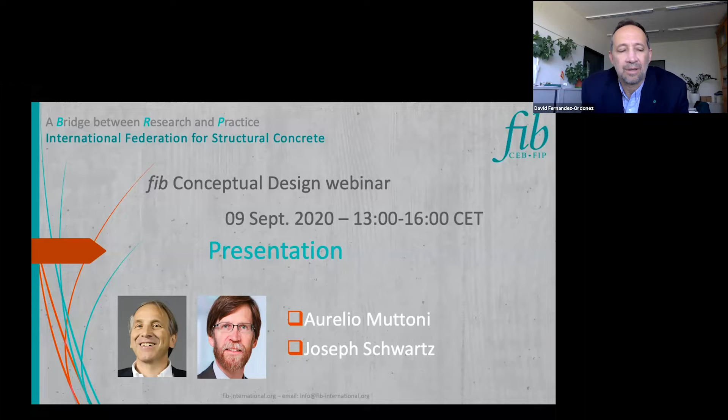Thank you, David. We will do our presentation together. Joseph Schwartz is a professor at the Swiss Federal Institute of Technology, the German-speaking part in Zurich, and I'm professor at the same university, but the French-speaking part in Lausanne. We are both part-time at the university, and we both have design offices and work part-time in practice.

Yes, of course, it's one of the most important parts in a design. It's mainly related to creativity. And the question is always, is it possible to teach creativity? And the second question is, is it possible to learn creativity? If we want to try to answer these questions, perhaps we can try to answer another question.

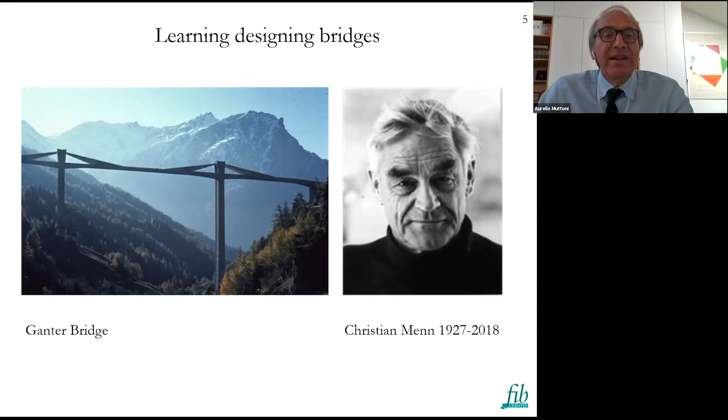So before we discuss this, and then later discuss two small projects that we have done, there are other questions that are also important to bring into this discussion. For instance, what is a good project? What do we call a good project?

A good project, we think, is a project which meets requirements all over the life of the structure, and of course also during the construction. The client specifications and users' experience are crucial, of course. The elegance and the site integration - to us, the site integration is also absolutely important when we talk about structural design.

The cost efficiency, this is a very important one. It is more difficult when you have to design something and you have too much money. It doesn't happen very often, but it is very important, and it helps a lot if you need to find an efficient solution also in terms of cost. Durability, robustness, resilience, of course, are absolutely important aspects, and sustainability, of course.

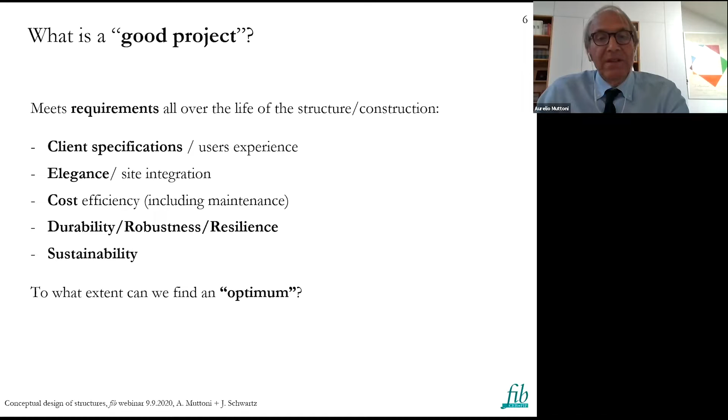And when we talk about these requirements and to what extent we can find an optimum, some skills and wills are fundamental in designing structures. One needs to understand how a structure works. This is a very important topic. So we started many years ago working together with Joseph, trying to understand how a structure works. I think this was extremely useful for us.

And another point - when we have a design, it can always be improved. This is very important for us, even when we are proud of it.

But how is it possible to improve it? And is there a procedure? So a lot of open questions. Do we need all structural elements? Some of them can be removed or simplified. This is also very important. I think improving a structure means also removing and simplifying it in many cases. So a very good design very often is one of the most simple ones that we can imagine. And can we increase the efficiency? This is a question that we should ask ourselves all over the process of designing.

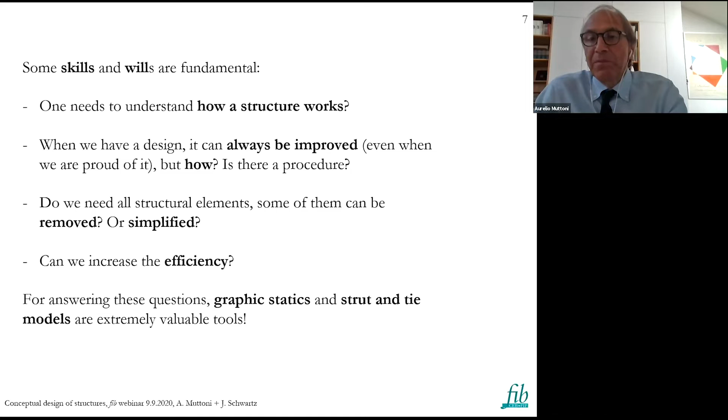And we have learned that for answering many of these questions, graphic statics and strut-and-tie models are extremely valuable tools. And with this respect, we had a good chance with Joseph. When we were PhD students, we started working on these topics, and this is a book that we started writing in '85, together with our PhD advisor at that time, Bruno Thürlimann. Another big chance that we had an extremely good teacher and good scientist. So together with him, I think both were crucial in our education.

And we have learned that it helps a lot in understanding very simple structures, like a simply supported beam in reinforced concrete. It helps understanding how it works just by investigating strut-and-tie models. And we have seen that with graphic statics, it's possible to determine forces just doing some sketches. It helps a lot understanding how the structure works. I think this, for us, Joseph, was absolutely crucial in our education and also in learning to design structures.

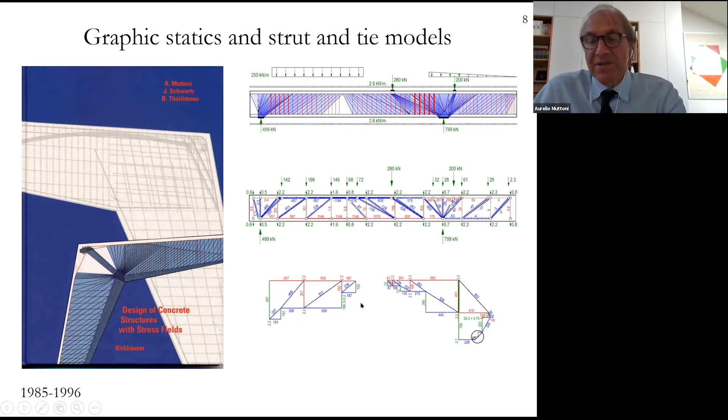And then we have continued with this. This is in '96. I had a very nice experience because I started teaching in a faculty, in a university for architects, Accademia di Architettura in Mendrisio. And this was a very nice experience because I saw that using these very simple tools based on graphic statics, it's also possible to teach architects how a structure works. And I think, Joseph, you have done the same in the last 20 years as a teacher to architects in Zurich. I don't know if you want to add something to this.

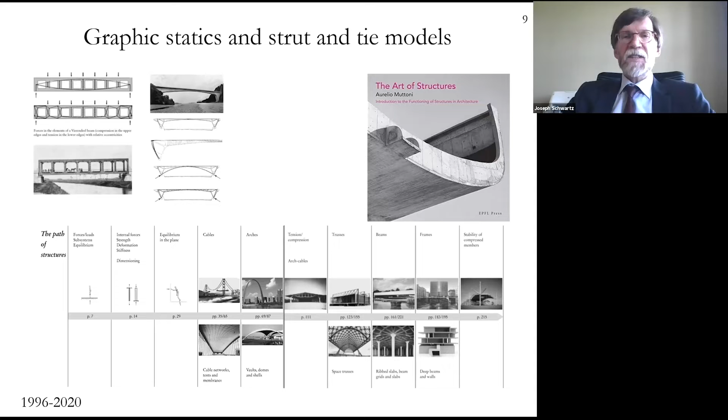Yes, perhaps you can show the next slide. Well, this is a very nice example.

Hello, good afternoon, good morning to everybody.

So for my part, this shows a little bit how we are introducing a simple way to show students how a cable works, perhaps coming back a little bit to the first presentation of our course, with these cables showing to the students how a cable works using graphic statics. The cable is the most simple element, but a very, very efficient and powerful element. And we gave the students a very, very small amount of thin cables, and it was very difficult to produce a net-like structure in a way that they didn't fall down. And so they could learn what efficiency means on the one hand, but on the other hand, they could also very nicely learn to feel how a structure works, to feel how the internal forces are really flowing at the interior of a structure. And we have the feeling that this is very, very important, bringing form and force together.

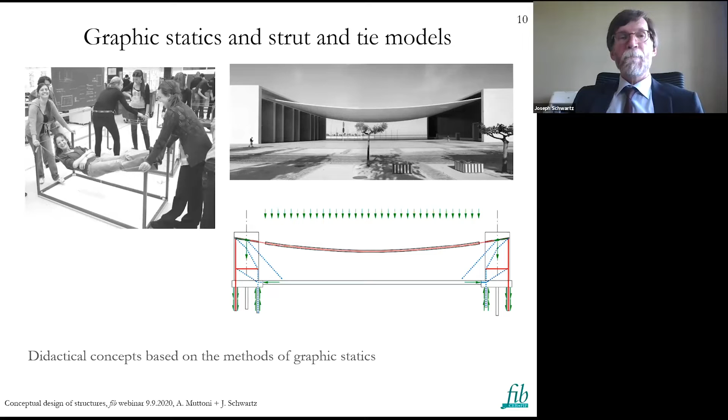But we have to be aware that structural design is just a part of the task. So another very important task we have learned: listen to the client, work as a team with the architect, with the contractors. This is absolutely crucial in conceptual design. Try to understand all site implications. Some of them are constraints, but they always help in designing. And we always say that without constraints, it is very difficult to design.

Try to understand what went well and could have been improved in your last project. It is the only way to do your next project better. But be proud of your projects, this is very important also. Even if they were not perfect, we all know our projects were not perfect, and now we have learned how to improve them. Projects are never perfect. And perhaps this is the most important thing that we can say: have pleasure. It is such a nice task to design structures. Do it yourself. Don't delegate it to a machine, to an algorithm, or to another kind of intelligence.

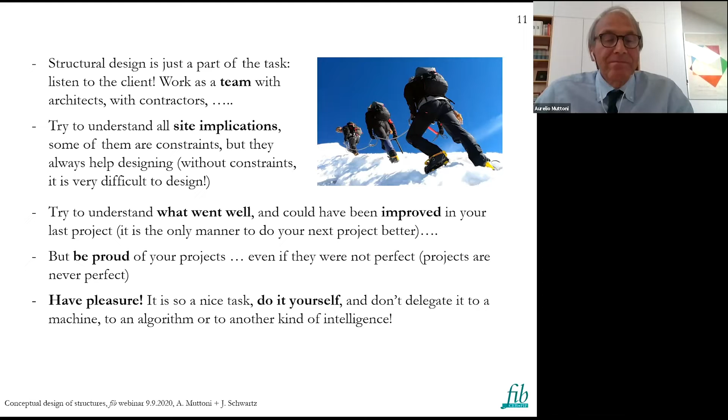So after this... absolutely, one short remark, or one small additional point I want to quickly mention. I think if we are speaking about team, for me it was very important to put this picture in: these people climbing a mountain, and they are climbing the mountain as a team.

When we are working with a design team in a project, it's clear that all members of this team have different training. They come from different directions, and it's not always easy to understand what they really want to achieve. I think it's very important to be open minded, to be open to the wishes of the architect, the contractor, and everybody involved in the project. It's also important to teach students that prejudices are not a good thing, and they really have to be overcome to work together.

All these people have other goals in their mind in some way. In this sense, it's very interesting to discuss the question of the optimum, which Aurelio has already mentioned. I think it's also very important, when working in a team, to understand that the optimum is not the sum of the optima of the different disciplines. That means it will always be a compromise. It's always possible to improve the project, but it's strongly dependent on the criteria fixed from the very beginning. Being aware of this is very important to be successful in developing a project.

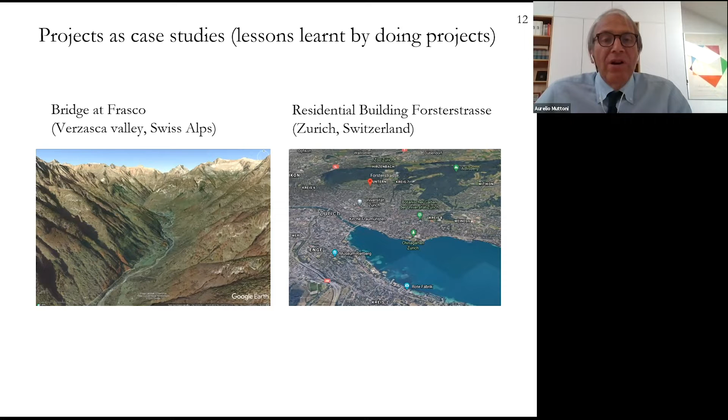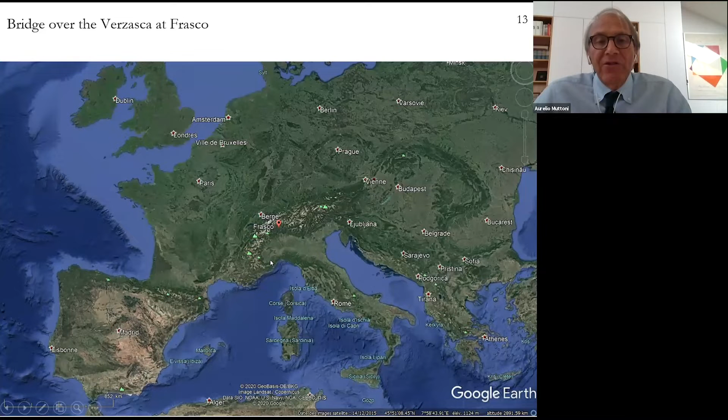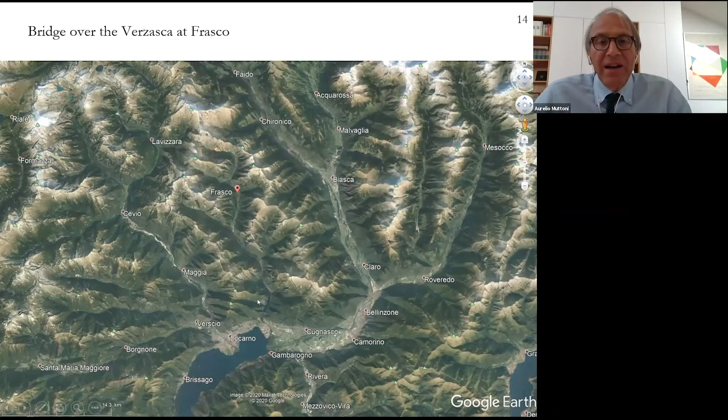About the site: it's very important to understand the site, as Hugo Corres already said before. We are here in the Swiss Alps, in the southern part, in this valley here. The language here is Italian, but it is still Switzerland. You see here a bit better the situation: this is the Verzasca River, and the task was to intervene on an existing stone bridge which crosses the river exactly in this location.

This gives an impression about the site. But as Hugo Corres said, Google Earth is not sufficient. One has to go there and study the site in a detailed manner in order to understand all the implications and peculiarities of the site. This is absolutely crucial, and not only the site itself, but also the surroundings.

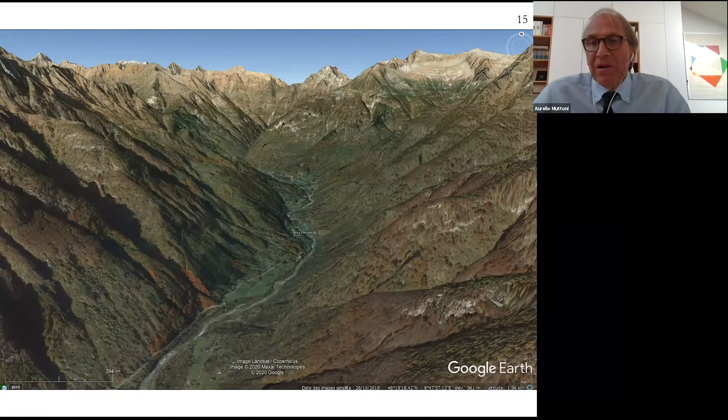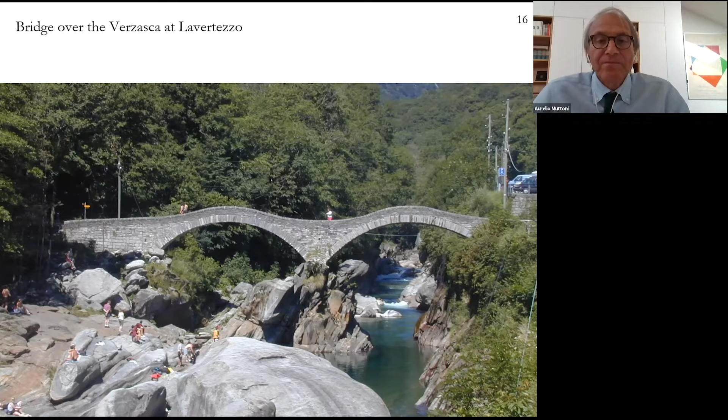There are many old bridges, mainly built in the 19th century. They are not so old, in fact, but reproduce exactly the same system as the Roman bridges. The Romans started building this kind of bridge, very similar to this one, about 2,000 years ago. You see there are side walls here, and very often a parapet, which is not just a parapet - it actually belongs to the bridge. If you remove the parapet, the bridge will look quite different.

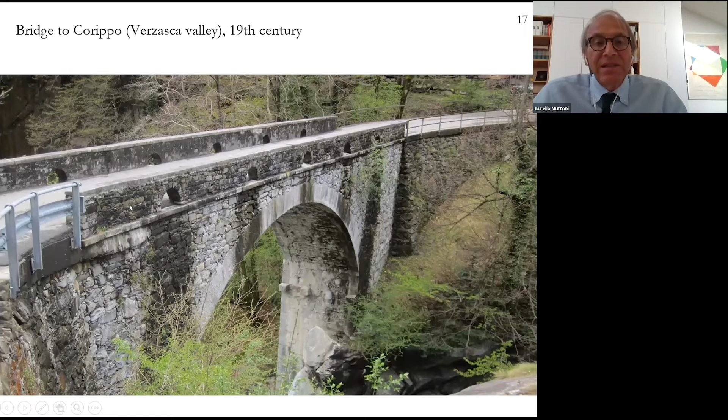Unfortunately, in many of these bridges, in order to widen the road, this parapet has been removed. This is exactly what we found in the bridge we were asked to restore - this was the situation when we started the project. The vault was not in good shape, and the parapet had been removed to widen the road. The client's request was to restore the bridge and also increase the width of the road again, which is not an easy task.

Perhaps the owner had in mind other projects that had been done in a similar manner.

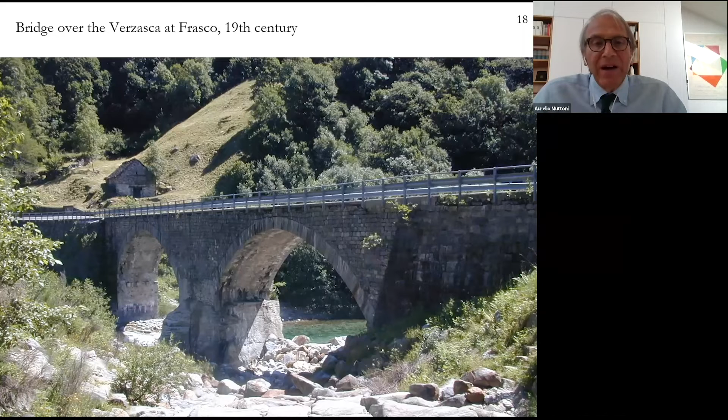Not far from this bridge, you see one that has been restored with a new concrete deck, a concrete slab over the bridge. I think this is not a good example at all. The parapet has been removed, and this cantilever creates a shadow. The perception and architectural quality of the bridge is completely destroyed. So I think this is really not a good example.

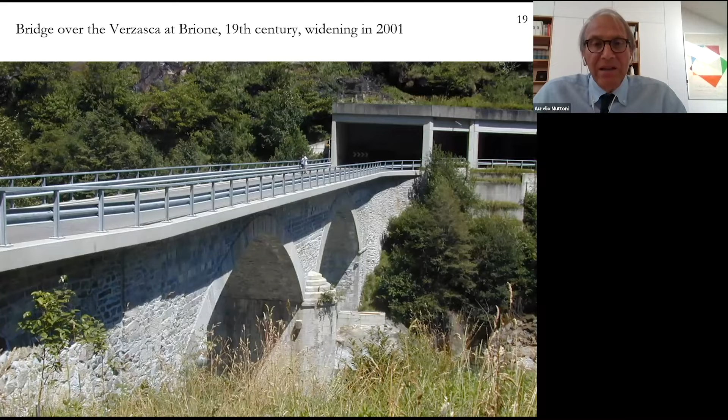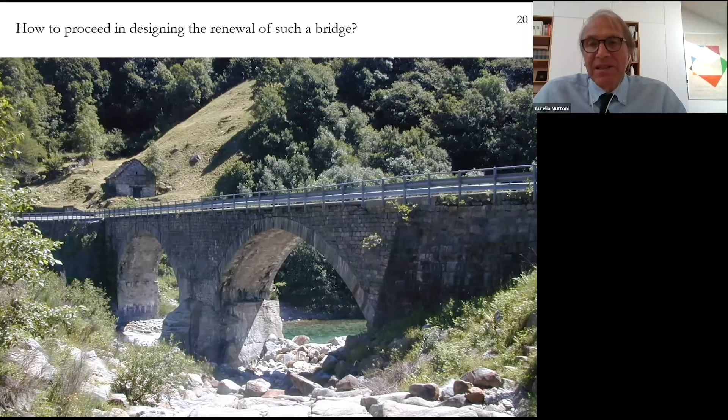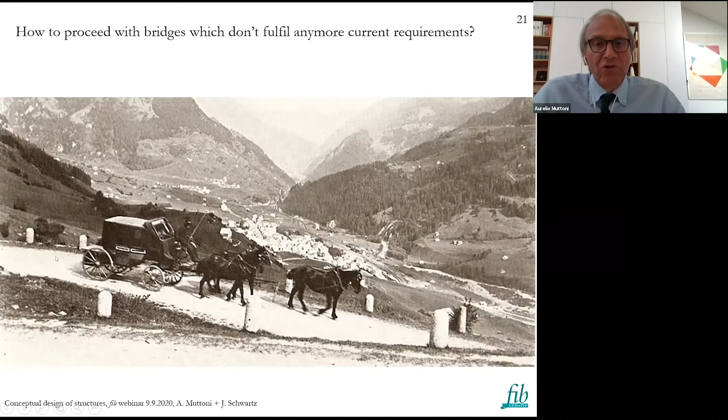When we started working on this project, the question was how to proceed in designing the renewal of such a bridge. This is a very general question. We have bridges and roads which were designed and built to be used in a certain manner, and nowadays the requirements are completely different. Many of these bridges don't fulfill these requirements anymore. Working on this, I came to the conclusion that perhaps the best approach was the same one followed several times: if a bridge doesn't fulfill the requirements anymore, the best solution is to build a new one and keep the existing one for other purposes.

This is also a very nice example in Ljubljana, a project almost 100 years ago by a well-known architect. You see it is possible to build a new bridge besides the existing one, with completely different uses—this one for cars and traffic, and this one for pedestrians and bikes. I think the separation is perhaps in this case really the best solution we can imagine.

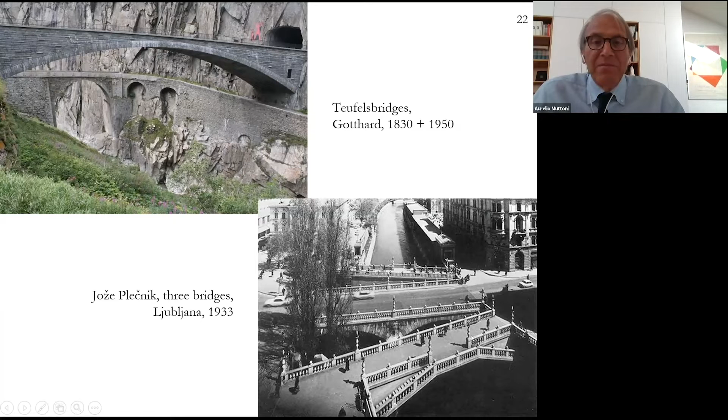This is what we decided also for this bridge here. This is the existing stone bridge, a very nice bridge. We decided to keep it, restore it, and use it as a footbridge for pedestrians and bikes. People can stay here and look at this very nice landscape. Then here there is a new bridge for the road. Here it's not interesting to just stay and look at the landscape, because there are cars, and they're too fast. But on the old bridge, it's a nice experience to be there. So this was the first very important choice.

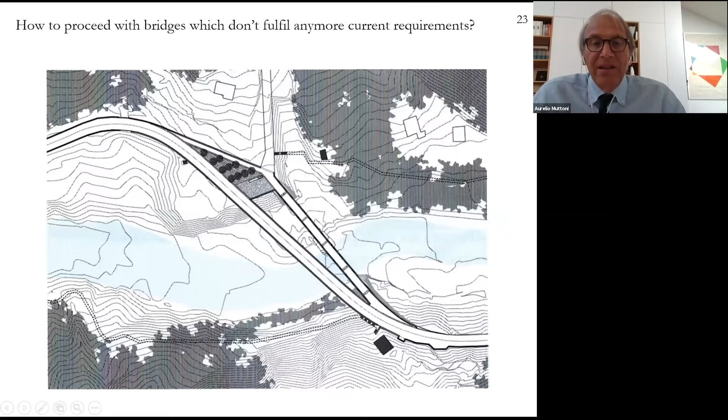When we start designing the new bridge, the site is very important, and there's another important question: can we be inspired by the existing bridge in designing the new one? This is the existing bridge—you see there's a block here, one block in the middle of this river, and they took profit of the presence of this block, building the stone bridge just on it.

So can we be inspired? Can we do the same? Well, not so easy. First of all, we don't have anymore the block where we'd need to build the new bridge. And what about the system? We have two arches—should we do the same, should we also build a new arch? This was my first idea: we have two existing arches with the block, but now we need to build the bridge with a much larger span because we don't have the block anymore, so it makes no sense to have a support in the middle.

Also, the technology and possibilities have changed in the last 150 years. My first idea was to say, okay, it is an arch—we will build again an arch, but with the best technique we're able to do nowadays. I remember at that time spending quite a lot of time trying to design a very slender steel arch with very slender elements supporting the deck. Working on this project, I invested a lot of time, but I was not proud of it at all. It was a very nice project from a technical point of view, and perhaps important in order to understand what was wrong. First of all, this project doesn't respect anymore the existing bridge.

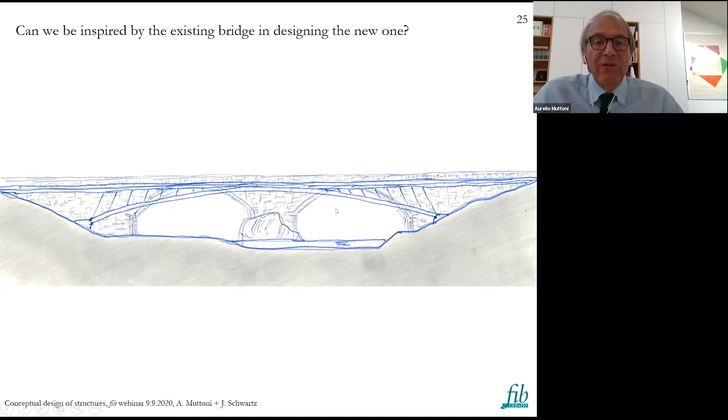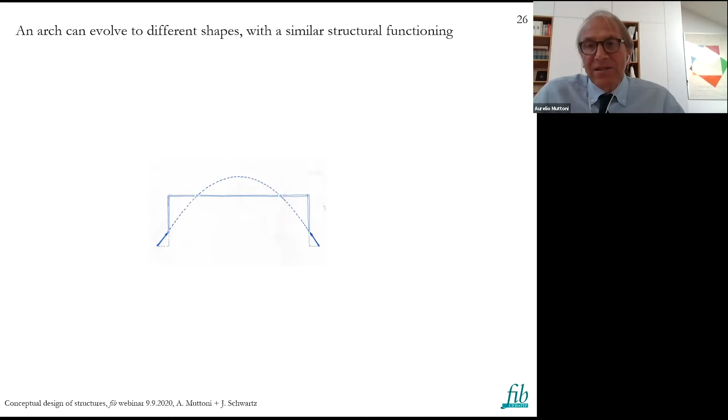But even in this case, doing this kind of project, you learn what you don't need, what is wrong. For instance, the arch is a very efficient structure, but you can adapt it so that it works more or less like an arch here, and then you get a frame. A frame has a very similar functioning to an arch, just with larger eccentricities, and at the end this is what I decided to do. So I started from the arch, but then tried to adapt its shape in order to better respect the existing bridge behind.

So, as I said before, a frame is just an arch with higher eccentricities of the thrust line. You can adapt the frame to increase the visibility of the existing arch, and to have fewer elements and better respect the existing structure.

Then, of course, doing this kind of consideration, there are also a lot of technical considerations we need to address. For instance, here we have a significant thrust force, because it's still more or less like an arch. We have a very large force that needs to be carried by the foundation, and these slopes in this kind of valley are quite unstable, because there can be a lot of water. This means it's very difficult to build a huge foundation here, and it was a big risk for the durability and robustness of such a bridge.

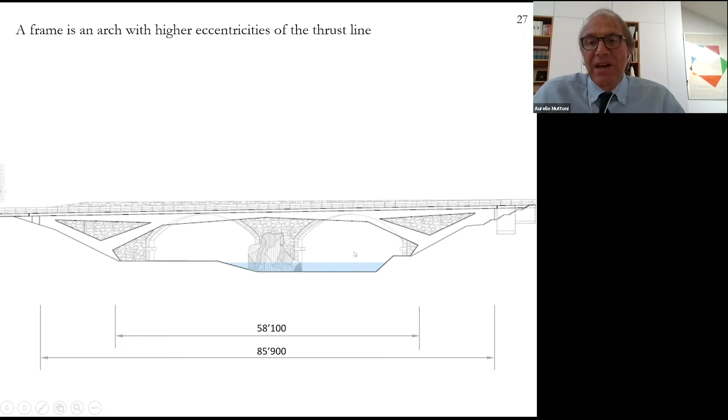And this was the next step. It was a technical consideration, but also related to conceptual design. I came to the conclusion that the most stable zone here, from a geotechnical point of view, is this one. And in order to optimize the earthworks, the best shape would be something like this.

It looks a little strange as a frame. Typically in a frame you have vertical elements here, but this is actually much more efficient in terms of constructability, and also because you reduce the horizontal component of the reaction, which is also a good optimization to reduce sensitivity to erosion.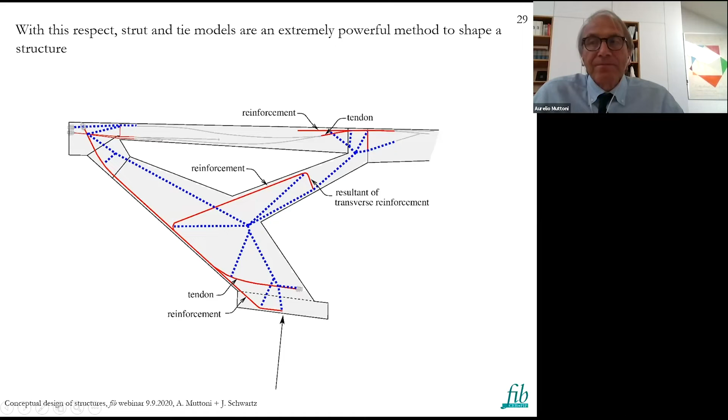This is also a very important issue—optimizing the shape of the structure based on the flow of forces. But that is not the only criterion for optimizing the structure; conceptual design is also very important. For instance, in terms of flow of forces, it would be possible to have a tapered beam, an element, a strut with variable depth. From a structural point of view, it would perhaps also be possible to do it like this.

But if you do this, you can see, if you increase the thickness here and reduce it here, your system will completely change. In this case, we have a bridge with this strut here, which becomes more important, and I think this element here will become more important too. And this is not the idea of the project.

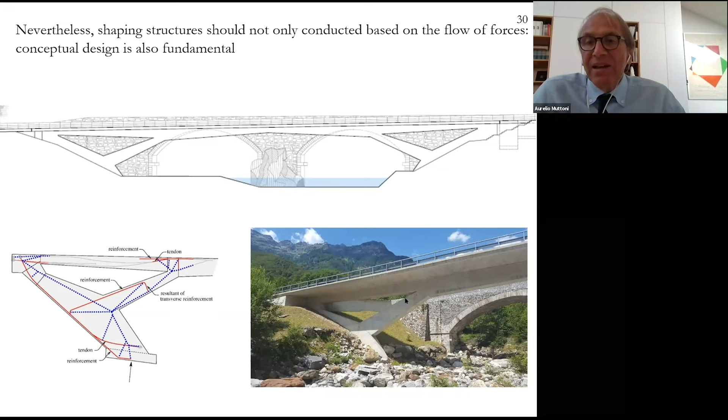There is another issue related to conceptual design here. When you build a new bridge beside an existing one, by definition you create a space. Very often you have to think in terms of space. We always design a bridge by sketching a cross-section, but a cross-section is not a 2D issue, it's a 3D issue, because it's related to a complex functioning which is typically 3D, and it relates to the space around the bridge, under the bridge, and in this case, between the bridges.

In terms of space, and in terms of the requirements of the road, it was unfortunately not possible to increase the distance between the two bridges. It was just not possible because of the road requirements. But it is possible, in designing the bridge, to increase the space under the bridge between the two.

And this is how I came to this solution, which is a minimum solution. It's just a slab with a strong beam. The eccentric actions will be carried by torsion of this beam, which explains the width, more than one meter.

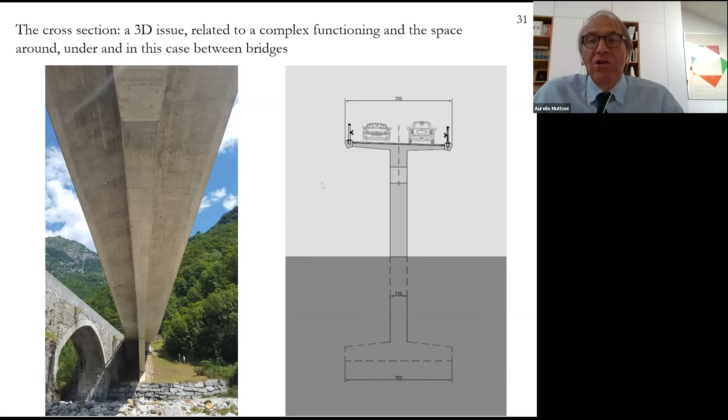So here are some pictures: the new one beside the existing one. The existing one here we have restored. I hope that in some years this new parapet, which is very similar to the old ones, will look similar to this wall. This was the idea: to have a restored bridge like in the 19th century, and a new bridge which belongs to nowadays but is completely respectful of the existing one.

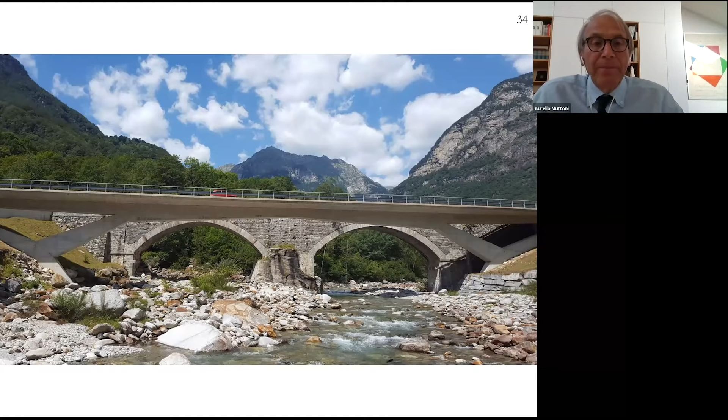And this picture shows that transparency is crucial in order to be able to see the existing one. This slide shows that having a strut here avoids the difficulty of having more or less the same inclination. It looks similar, but of course it's not possible to have exactly the same inclination.

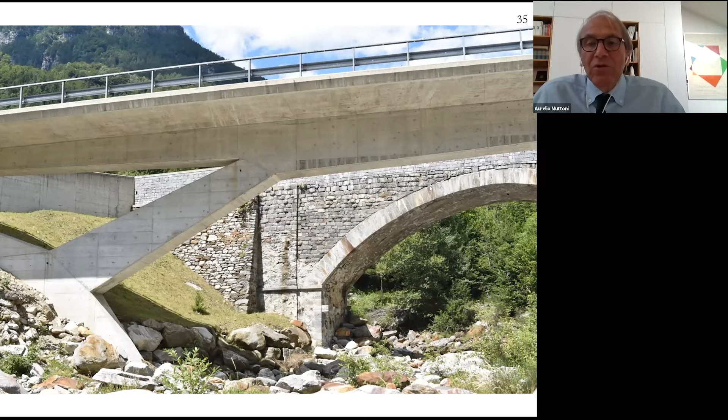But what is the inclination of an arch? Well, it refers to the main part of the arch, here, and to having a tapered beam here. It also helps avoid the conflict of slopes between the strut, the wall, and the arch.

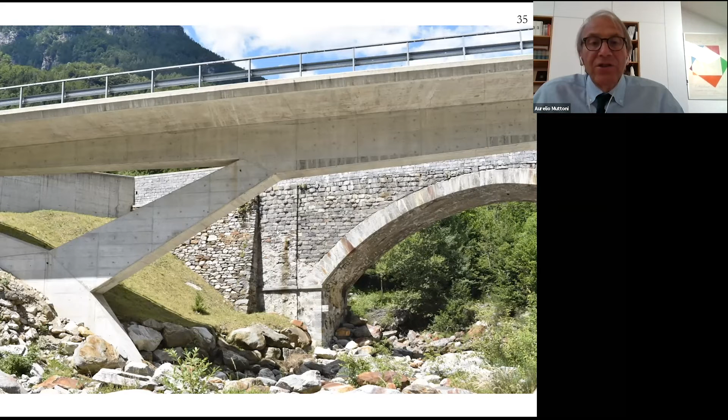Here's another picture showing the existing one and the new one behind it. And here again, if you have a variable depth, this is very useful because you don't have a clear reference between the strut and the arch, which means the perception will be simpler, because you avoid the conflict of slopes.

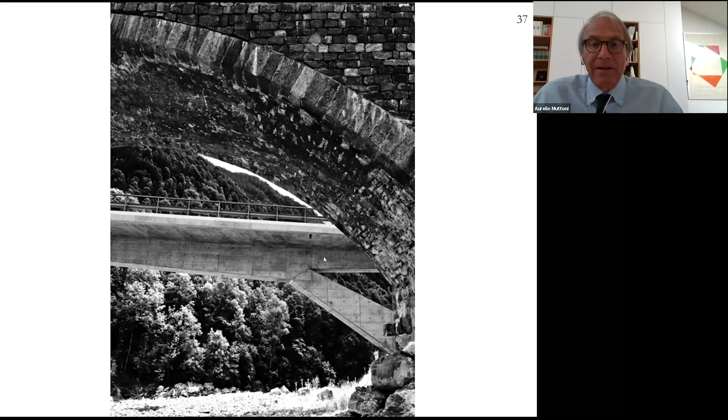As always, you are never alone when you design a bridge. There was a young engineer who was very important in doing the calculations, and the calculations showed that some elements needed to be improved and adapted, and the shape also slightly changed as a consequence. This is a very nice way to learn designing bridges - if you do calculations, you see the things that need to be improved. This is also a way to learn designing.

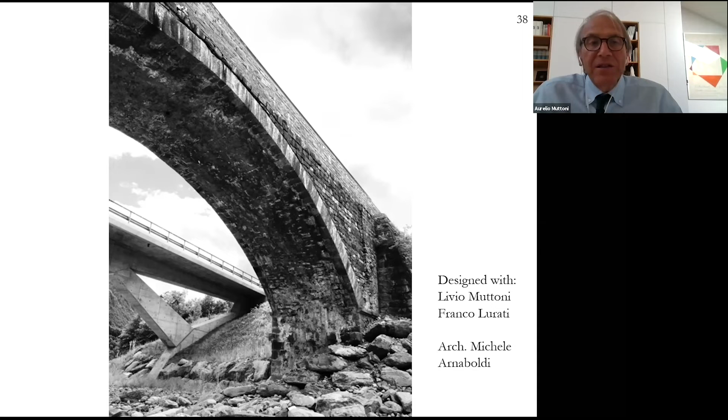And this is my partner in the design office where we designed this bridge. And here we have also an architect who helped us with considerations about the parapet and so on, and also in designing the space between the two bridges. Just perhaps some considerations with respect to working with architects.

This is particularly valid for bridges. During the last three decades, I've learned that one of the most fascinating activities of a structural engineer is to collaborate with architects and to contribute to their projects by discussing our structures. This refers to buildings, in fact. In building design, in some cases, the structure can become a source of inspiration for the architect's work and contribute to expressing an architectural concept. So we are contributing to the project by the architect.

In bridge design, the process is similar, but the roles are usually reversed. I'm convinced that structural engineering should be one of the most important components in designing bridges.

For instance, in the bridge that I've shown, and in many others I've designed, architects were involved. Their contribution is not always easy to describe. In some cases it was just a critical remark, a suggestion, or even a question at a crucial phase of the project. But even if the contribution can be defined as minor in terms of hours or quantity of work, sometimes just a remark or critical question is sufficient to have a significant impact on the final result. And this is the very nice thing about working with architects - very often they are important to improve our designs, also in terms of structural design.

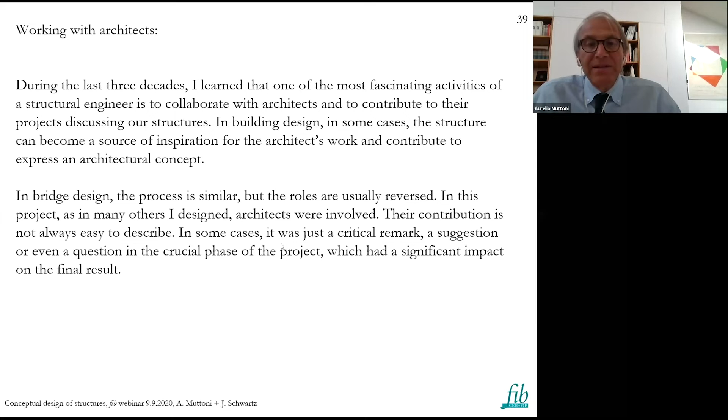So I think that the best is that we switch to the next part. Okay, then I will go on with the second example.

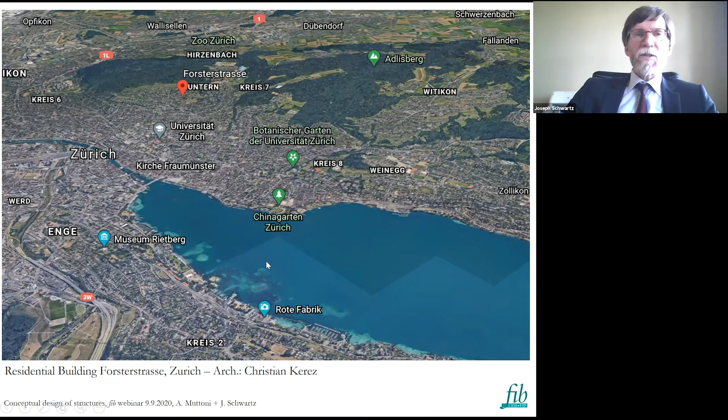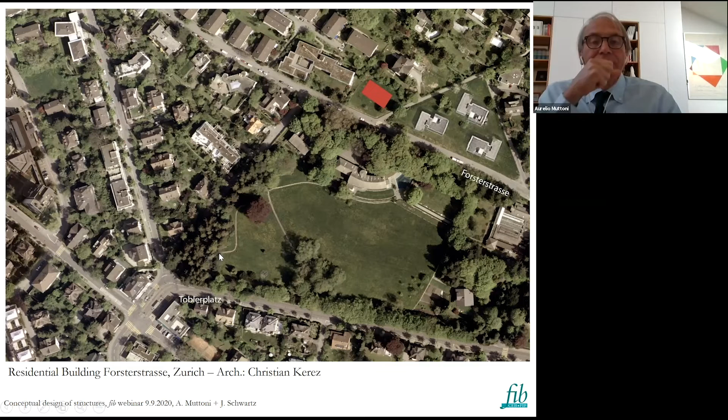This is a residential building in Forsterstrasse. We developed it together with Christian Kerez, and as Aurelio already mentioned, it's a totally different situation. We are here in the city of Zurich, close to the forest. We are on a slope, and there is a very nice view of the lake, the Zurich lake. Now, looking at the site situation, we see that it's a very small site. The goal was to build an apartment for 5 families, and we see this huge property here on the south. The lake is to the south, and you see these very high trees that block the view of the lake during summer and open the view in fall and winter.

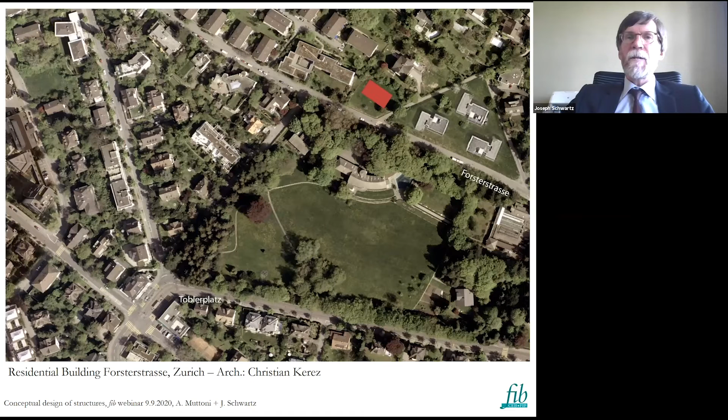Now we see these two aspects. The first is that we have this situation of openness and closeness on the one hand. On the other hand, we have this rather small site, and the idea was to develop a building, a structure with interior spaces that seem bigger than they are in reality. Also, as we heard before with the connection and space between the two bridges, this effect of generating space and influencing it through structure seems to be a very, very easy way.

Perhaps I want to start with this quote from the architect Christian Kerez, who says: 'Architecture is for us an indissoluble unity of material, construction, structure, and technical installation. The meaning of all these elements is strongly related to their contribution to the definition of architectural spaces.'

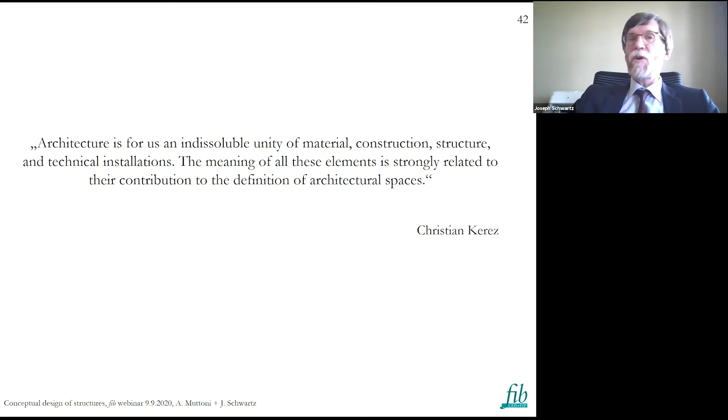From the moment we speak about architectural spaces, we are clearly going from 2D to 3D, which is not always so easy for civil engineers. But I think that from the point of view of the flow of internal forces, it's very important to be trained in thinking in three dimensions, activating the transfer of forces in three dimensions, as we have already seen today in all these different examples.

Now we created a small grammar - a grammar of architecture, a grammar of structure, a grammar of space building - by using only walls and slabs, no columns, no other elements, and no structural elements in the facade, with some exceptions.

Those were the rules we started with, and that was also the grammar, with a very small amount of rules, a very small amount of tools. We really tried to push it to the extreme.

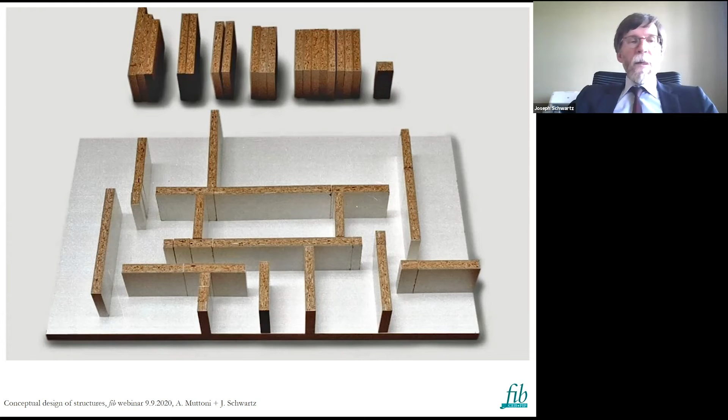Now, from the point of view of static principles, as I already mentioned, it's a question of balancing walls, so that it's not necessary to put one wall directly upon the other on the ground floor. The idea was to balance wall by putting one wall on the other, so that they only touch at one point when going from one floor to the next.

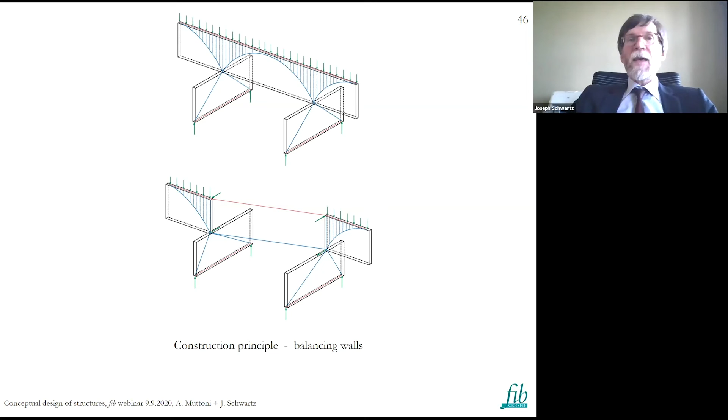That means now we have the whole repertoire and we can start to play with this. The big advantage is that, as the walls are no longer placed exactly one on the other, it becomes possible to have spans of the slab much bigger than the slabs between the walls on one floor, because the slab can either be posed on a wall or hang on another wall.

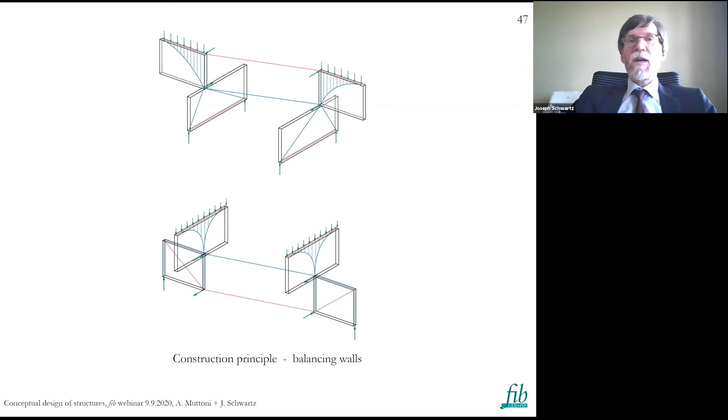You see this very nicely in this picture, how these walls are interacting. You also see very nicely that all the walls are in relation from the point of view of structural design, but also clearly in relation from the point of view of generating space and architectural design.

So it was a very nice negotiation between Christian Kerez and me to develop this system in a way that both the structural and architectural goals were, in the end, fulfilled in the best possible way.

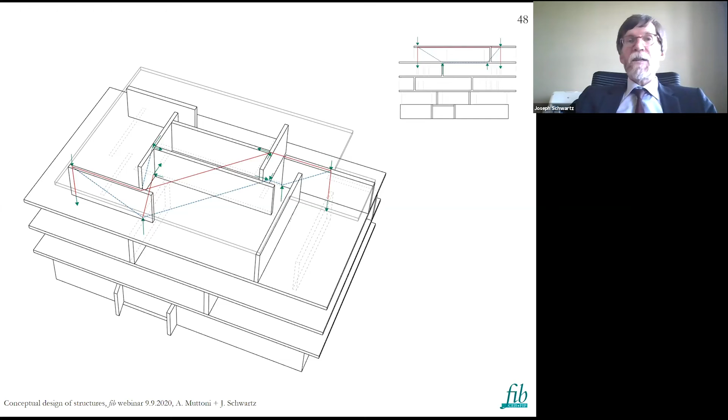You see this cantilevering wall, you see the slab, this wall is behind. That means this part of the slab is hanging on this wall. Also here you have a similar situation.

We have a very big space here, and this part of the slab is hanging on this wall. That means if, as a civil engineer, you are in this room or in that room, you cannot easily understand how it's possible to have these very huge spans without understanding that the slab is really hanging on this wall.

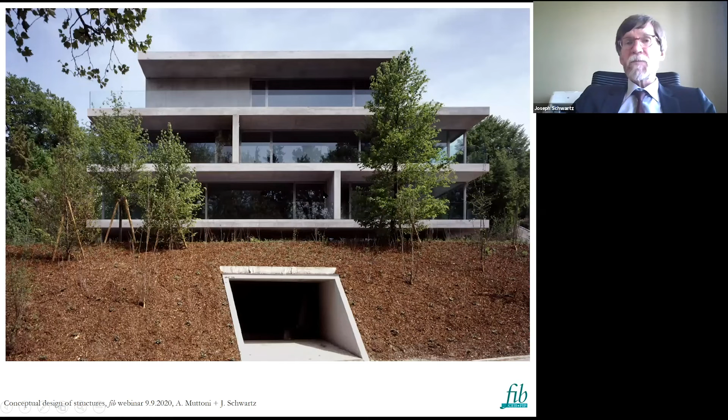There you see the final project. You see very nicely that we don't have any supporting elements in the facade without these separation walls. These are the separation walls between the different apartments, and on one hand they are necessary from the point of view of use. On the other hand, they are also nice to have as a kind of disturbing element in this clean situation of free facades.

For me, it was clear that we have to eliminate these columns, because if we are working only with walls and slabs, it would be a very nice challenge to have this parking garage with 25 meters to 15 meters without any columns. Also very nice that the building is floating here—you don't have any structural elements in the facade between the cellar story and the first story of the building.

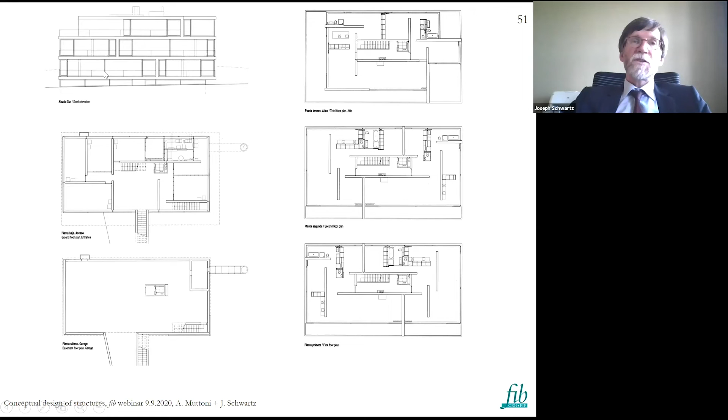Here you see the principle, and one more quote. The same walls which are part of the introverted spaces at the interior of the apartment are leading to totally glazed open living spaces. This leads to antithetical qualities—cavern and pavilion, open and closed, heavy and light—to an indissoluble unity. These characteristics are in close mutual relation and are variable occurrences of the same unique spatial concept. A very clear concept allowing all these characteristics.

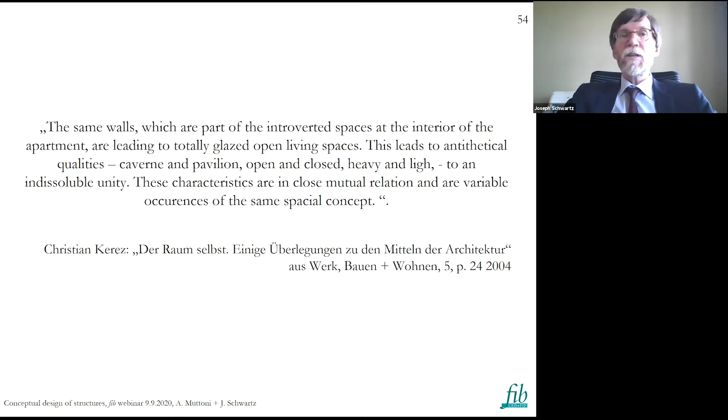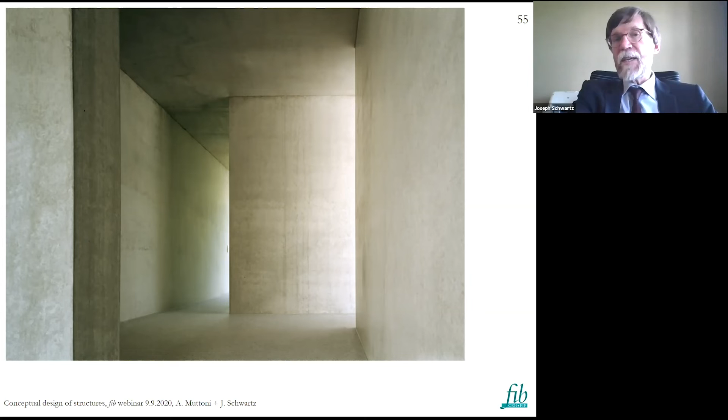You see it very nicely here at the interior. It seems to be something like a cavern. You feel very nicely how light is coming in, that there is open space on the other side. You can pass it, then you see it, and when you are going through this opening, you are coming to this totally open space, the one I mentioned before.

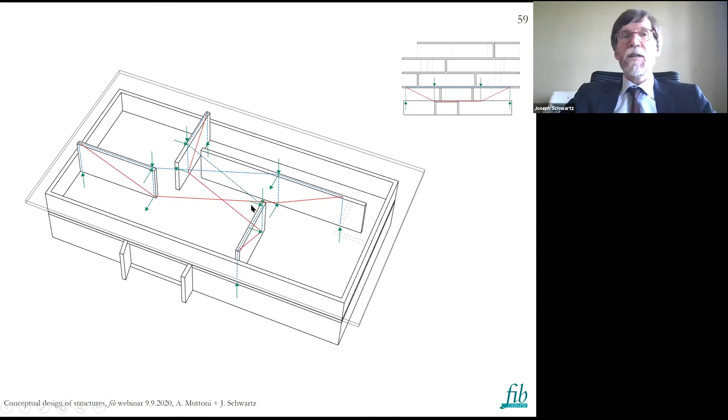You cannot understand how this can statically work if you are not understanding that there is this wall above your head supporting the slab. Here you see how we overcame the columns in the parking garage using this beam-like 3D system. With the deviatoric forces of the pre-stressing tendons, it's possible to eliminate the columns here. The same in the other direction. These deviatoric forces are replacing the columns so that it becomes possible to have this garage without any supporting elements.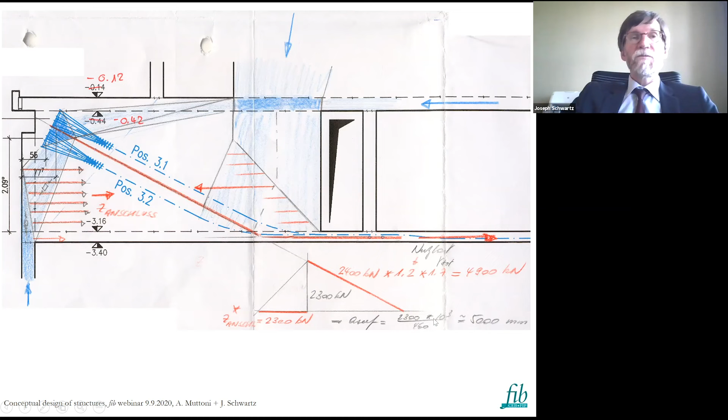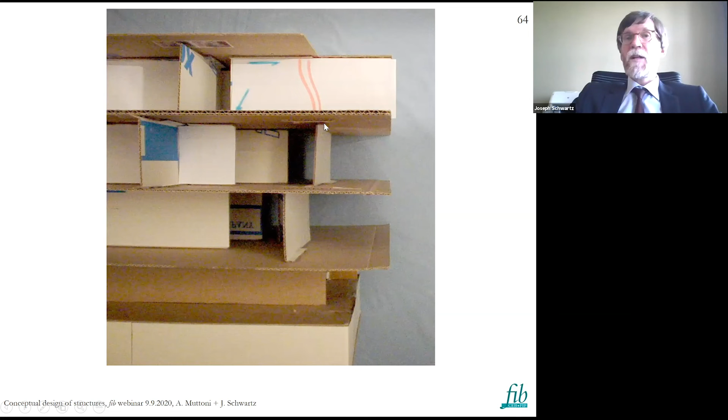The same for a wall that was hanging, and one or the other walls are hanging. You see the situation here. We put also pre-stressing cables in, pre-stressing tendons in, because here we have only 30 by 30 centimeters to have the whole tensile forces in the system. And you see very nicely how it comes from the lower wall and goes in here, and the compression strut develops something like a hidden column at the interior of the wall that was then built here.

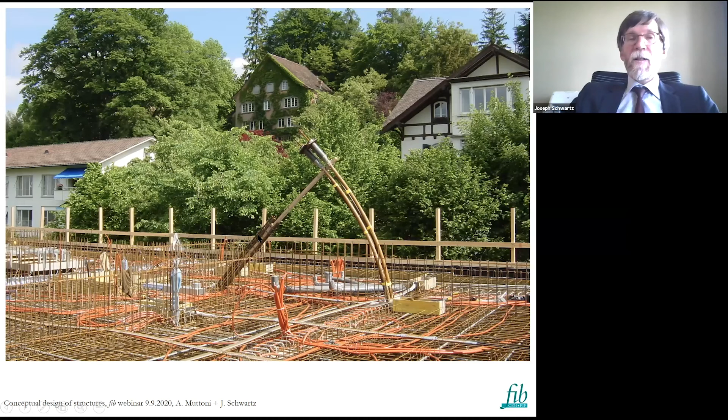It's clear that all these considerations I have done till now in my presentation—the position of the different walls, the span of the slabs—all these things are dependent, and the aim was to have cantilevering slab elements with a maximum of 5 meters. This was solved by pre-stressing tendons, as you see here, nicely developed in the way that dead load of the slabs was perfectly balanced by deviatoric forces of the cables. This is, of course, very important not to have problems with very expensive glass panels in the facade.

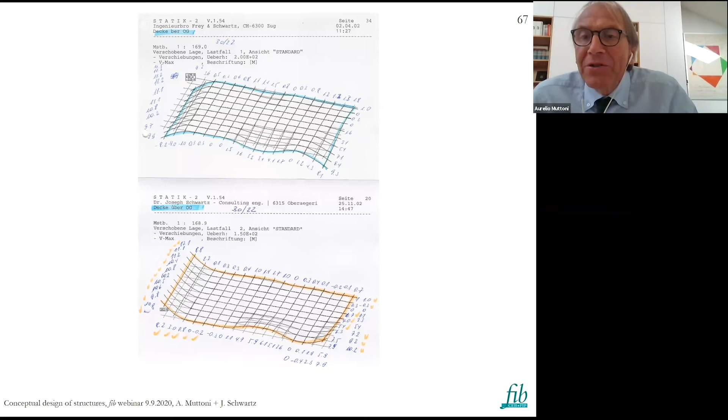Perhaps, Joseph, if I may intervene, this example shows really very nicely that even if we do a composition of walls and slabs, which are 2D elements, in fact the composition is typically 3D. It's a space problem, and one has to keep in mind that it is a 3D problem which is related to space and also to forces in the space. Exactly.

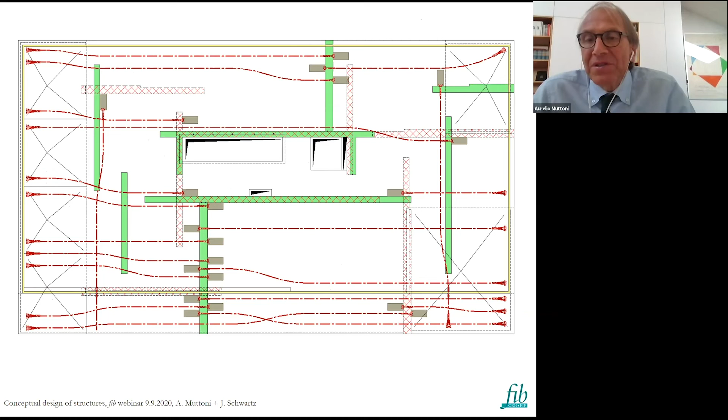It was very important that we always have these abstract concrete surfaces. The aim was to have very abstract surfaces, so we didn't put any anchorage heads in the outer elements. Where cables went through the whole building, we had two intermediate anchorage elements, always placed in the walls so that splitting of concrete was avoided. These openings didn't go through the whole slab, so it was possible to have concrete beneath them, keeping everything totally hidden and abstract at the end.

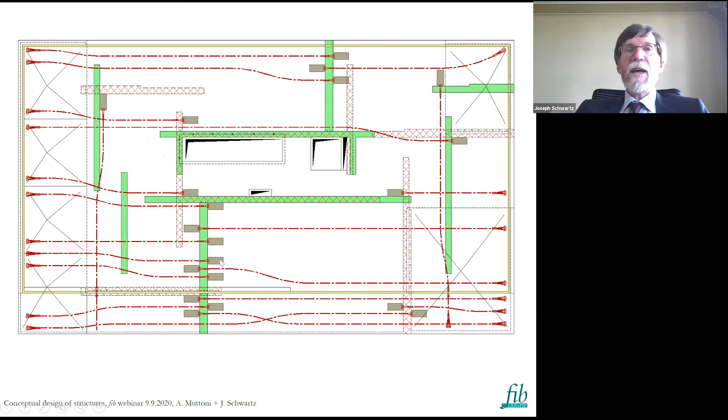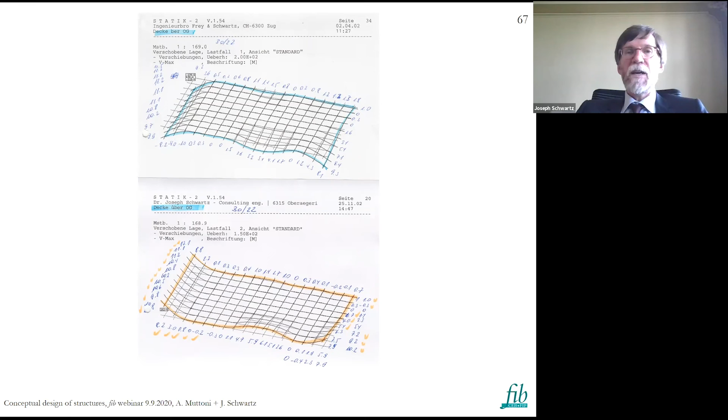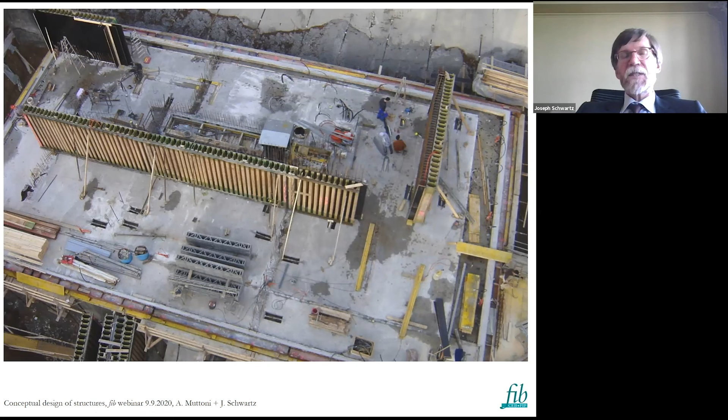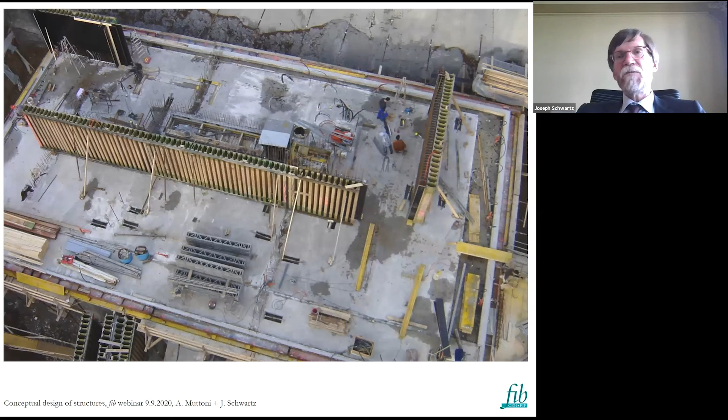It was important for the architect to have these very abstract surfaces, and important to understand from the point of view of conceptual design that all these elements—slabs, walls, conceptual development, realization on site—everything is connected. It's not possible to do one step without thinking of the other.

You see very nicely how the aim was reached at the end, how the spaces are very abstract, how they really seem bigger than they are in reality. You see also how the exterior comes into the rooms, how the colors at the interior are given by the color of the landscape—here a bit more the color of the snow, here a bit more the color of these green plants.

Here you can feel the strength of the structure. You can feel that at the end it was possible to realize a building where it's no longer possible to answer the question: what came first, the structure or the architectural idea? Christian Kerez cannot answer this question—I cannot answer this question. They were developed at the same time, developed as a team with high respect, considering all aspects of everyone involved, until the last element was built on site.

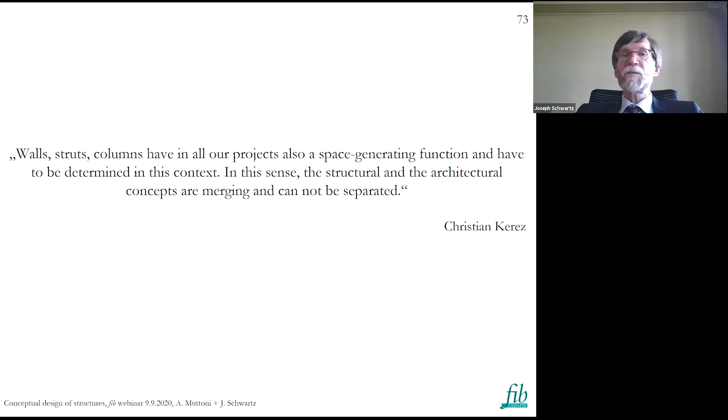Thank you very much. Walls, struts, columns have in all our projects also a space-generating function. It has to be determined in this context. In this sense, structural and architectural concepts are merging and cannot be separated. That's it.